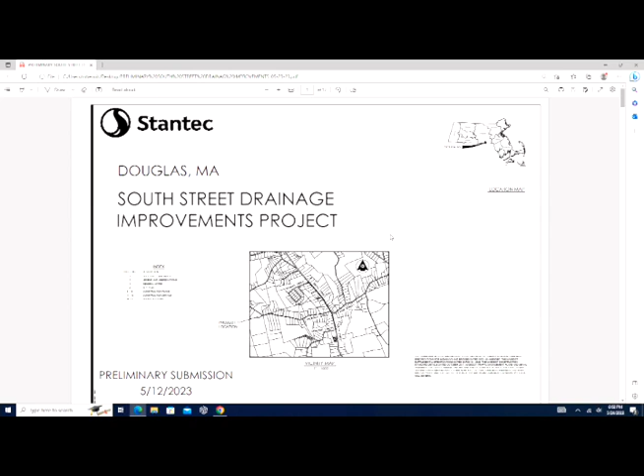As I said, my name is Dave Glenn from Stantec. We've been working with the town on this project for about a year now. We have provided a preliminary plan, which is shown on the screen. This plan addresses proposed drainage improvements, the proposed project, and project limits.

Sure. Am I there yet? Can you tell me where to go? Yeah, that one. This one.

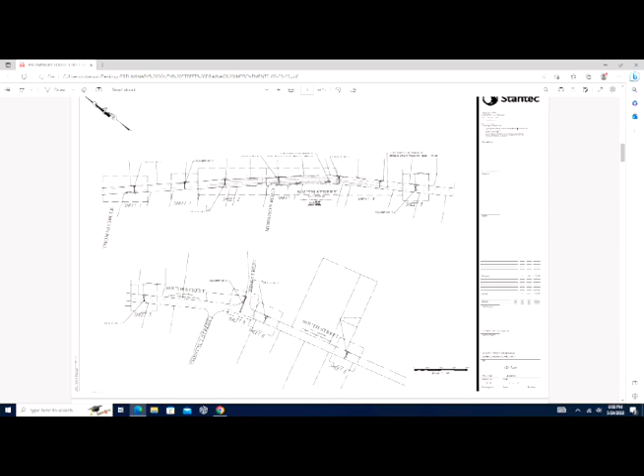So this is a key sheet of the whole project corridor. It's basically starting from Thomas Circle, which is a private way, going all the way down South Street, and ending pretty much at Hemlock. The next sheet, I think... Nope. Oh okay, yeah I can cut it off. But Hemlock is right in this location here.

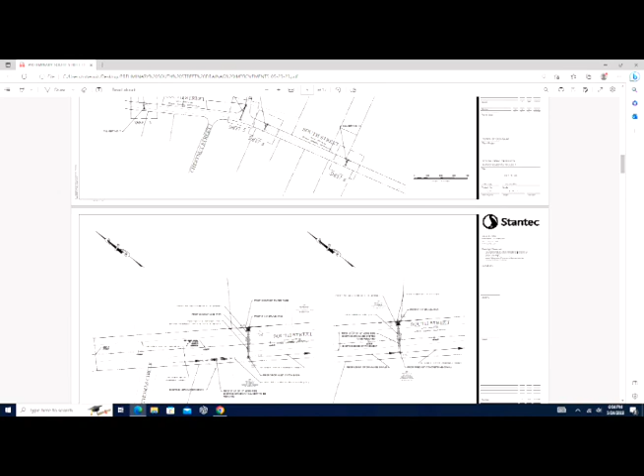On South Street itself, there are approximately 10 cross culverts that we'll be replacing that go underneath the road. The culverts that are there now, some are corrugated, some may be concrete, but they're not in the best of condition. So the goal of this project was for drainage improvements to replace all 10 culverts with new culverts.

We're going to keep the same size of the pipe that's currently there now, whether it's 12-inch, 15-inch, or 18-inch. Size is staying the same. We're putting in an HDPE or plastic pipe, which is more durable than what's out there now.

It's a corrugated pipe. There are 10 locations, and in these plans we actually zoom in on each culvert location, giving a detail of the culvert, size of the culvert, and what's being replaced. So that's one part of the drainage improvements, replacing all 10 culverts.

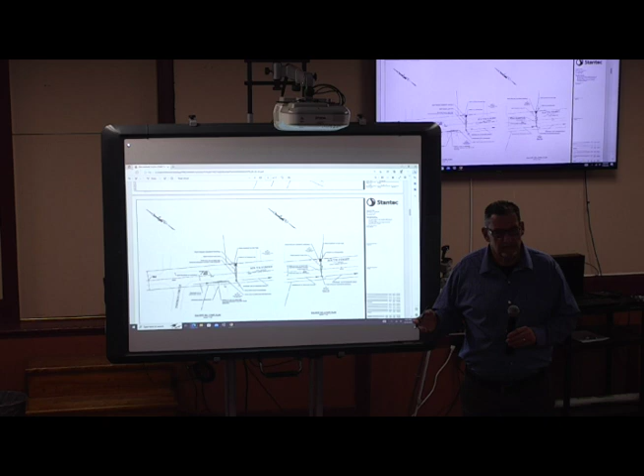Obviously, when you replace the culverts, you've got to do the head walls or the outlets. So all the outlets will have a precast concrete head wall. Right now there's some stone out there, a mix of everything in the head walls. It's all going to be a precast concrete head wall with all the culvert outlets.

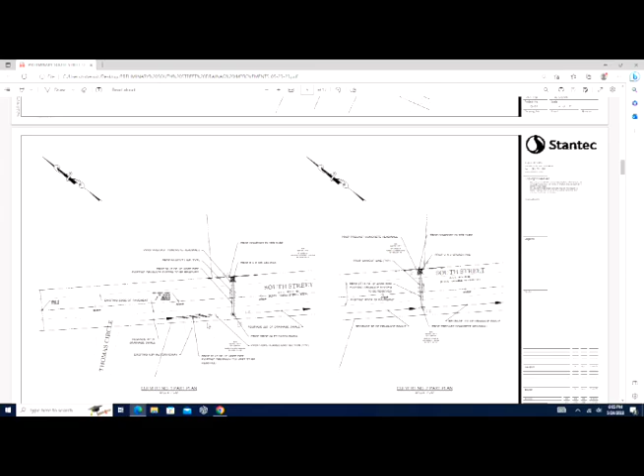The inlets, basically, it's going to be what's there now, except we're putting in new structures. There's a catch basin there, there'll be a new catch basin structure, precast structure. If there's a drop inlet structure there with a throat, there'll be another catch basin with a throat. So basically we're taking out the old structure that's there now and putting in a completely new structure. That's being done at all 10 culvert locations.

So it's a combination of a new head wall, or a drop inlet or catch basin structure. And the road will be paved, with temporary paving where the culvert is done, and maybe we'll talk later about the second phase of the project.

Other improvements - obviously everybody knows there's a swale out there. We're looking to regrade probably 60% of the swale. It's either going to be completely regraded, reshaped, reloamed, reseeded, and then about 30% of the swale is going to actually be regraded where we'll put in crushed stone, 2 to 3 feet of crushed stone, and a riprap bottom to help control infiltration, get a little more infiltration, and control the flow.

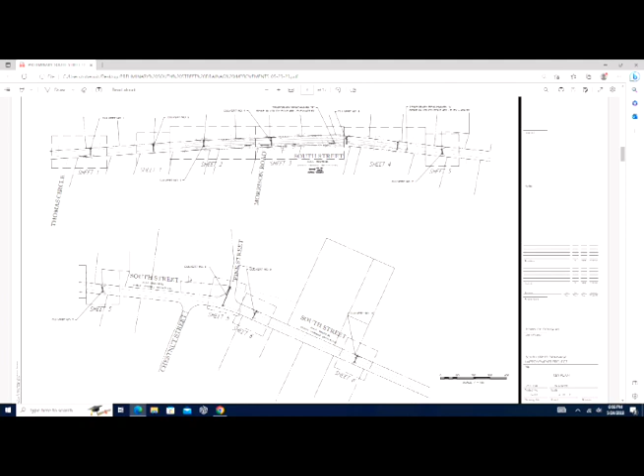And then we're actually going to put in stone check dams within the swale that will slow down the flow of water. So we're trying to control the water a little bit more within the swale area, which is on the east side of the road. So we're not looking to change drainage patterns.

So if the flow was going to a certain location now, in general we're keeping that, but we're trying to control the flow a little more by regrading all the swales, getting some infiltration in there, cleaning up the swales. The road will be paved as a second phase, so you get a crown back in the road, which you really don't have out there now. I think all these improvements will help control the flow of water within the roadway system itself.

We're also replacing a number of culverts at individual driveways. If you have a culvert under your driveway, that's going to be replaced too, again with the same HDPE pipe. That will have plastic flared ends as opposed to a concrete head wall. Those are being replaced also for driveways.

Overall, I think it will be an improvement over what you have now. Between the roadway repaving, the drainage improvements, cleaning up the swales, putting in the new culverts and new structures, I think you're really going to get more control of the stormwater flow in that area. It'll be an improvement over what's there now. That's really an overview of it.

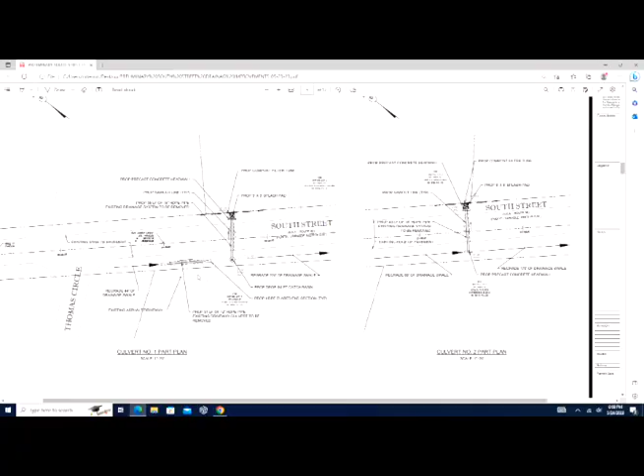Again, these are preliminary plans. We haven't gone final yet, so obviously I'd like to get feedback from you folks who live there - you know it better than I do. So I think that's really a quick overview.

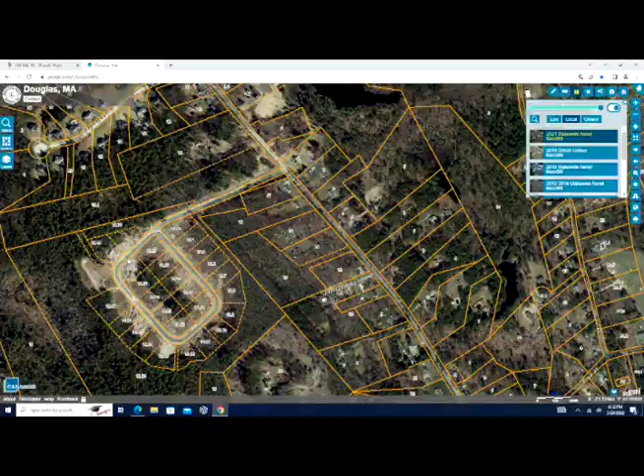And you're only going to go as far as Hemlock? Yes. I don't understand why you don't go right down the Rhode Island line, it's a mess. It's the whole money thing. We had to find a project limit somewhere. Across from, just before you get to Billy Porter's down there, when you get a hard rain, there's a puddle that'll suck up the whole car. I think that's a good point, I think you guys even mentioned that, that's another phase. So we get X amount of dollars through Chapter 90 a year, and this project, preliminary numbers, is over $1 million.

That's all the money we have. Correct me if I'm wrong, this is the one road you're looking at doing this year. Correct, it's the only one. So it's not like you're taking them off of another job, they're going to have their direct and undivided attention. Are you having the same contractor that paved it a few years back up by Downs's? It's going to go out to bid, so we're not sure who will get this.

I'm sure. So I sent you numerous pictures of the flooding that takes place in the front. You said you forwarded it to this gentleman. Of course, I don't know if he can specifically remember, but there were huge pictures of the flooding. It's been out there, a big huge pond. Do you think, in your opinion, that what you guys are doing is going to change that? I think it's definitely going to be an improvement.

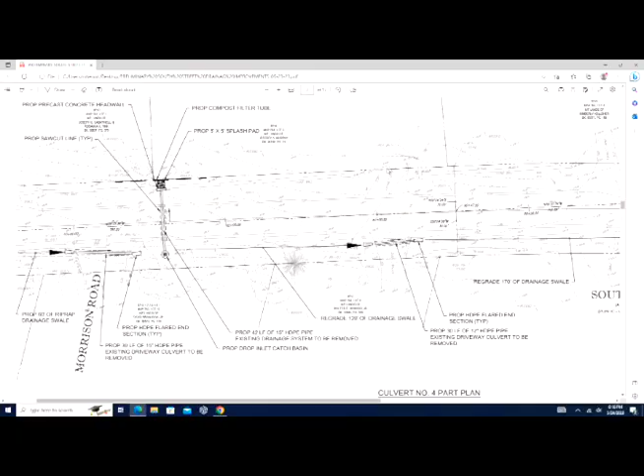Which property is yours? 204. So on our property, there's a trench down, and the water comes in, fills up in the woods, and goes up into the man-made pond behind McNeil Hall. Now you have one right above you that may or may not be functioning. Oh, it's functioning, it does function. That's the thing, and we're going to clean these out so they function better.

I can't see how they're going to. I don't see, are there people up the road who aren't getting any water while we're getting all of it? Or are they getting water up the road as well? It just seems like once we clean out the pipes, it sounds like more water, not less.

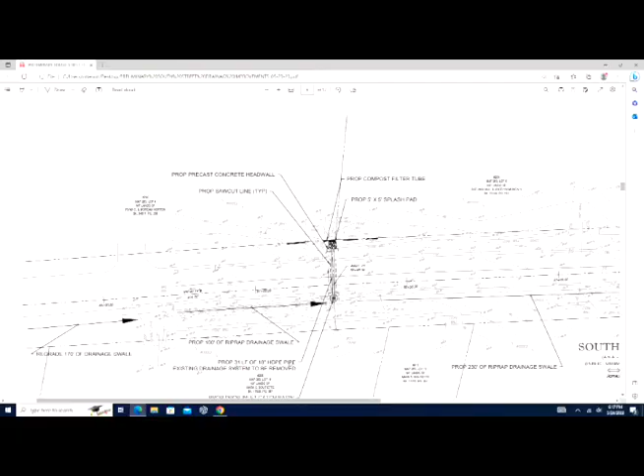Well, I think once you reestablish the crown in the road... because right now the sides are built up from sand, from what I can see, so some of that water isn't even getting into the swales off the side of the road. Once the crown is established, you'll at least get the water off the road into the swales, and we'll regrade the swales, get crushed stone in for infiltration, and put in check dams to slow down the flow of water.

Can you define the word swale and where they're located? The drainage swale is the channel across the street where they've got the little trench, the one the Amazon guy gets stuck in all the time, on the other side of the street. They clean it out every once in a while.

Yeah, I think there's definitely a need for maintenance on the swales that are there now. This project is going to basically maintain these swales, regrade them, and rebuild them up so they're functioning a bit better than they currently are.

Is this water drainage going to be MS4 compliant?

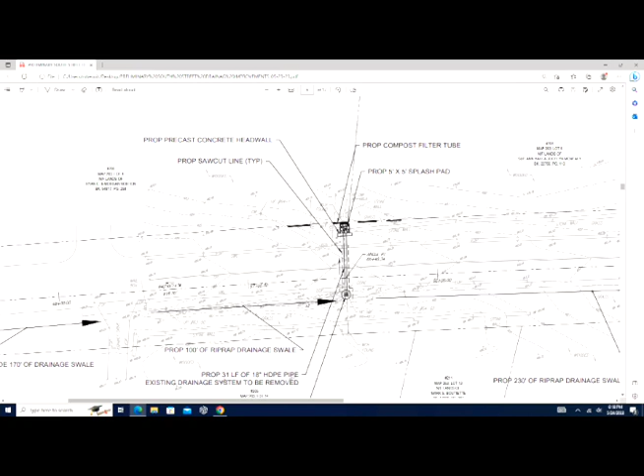This isn't an MS4 area. Why isn't it? Because the state defines our MS4, and that's not included in it. Our MS4 area is all down here, downtown, defined by population and density. Out there, it actually stops somewhere before Old Farm Road on South Street. That's as far as it goes.

I have one more question. From the culvert, we have a trench, as you know, that our neighbor dug, blocking us from a large portion of our property on the other side. Are we required to keep that trench there? Because it's a hazard. Fully knowing you guys are going through litigation right now, I don't think we can comment on that. And that's private property, right? No, it's my property. So I don't know how we can answer that. We've mentioned it in the past, and you've said our work is contained just within the right of way. The trench, I don't think we can comment on, because we didn't do it.

So what are we supposed to do with all this water we're getting from the culvert? Well, the way it seems, you're getting probably a lion's share of it already. If it's spread evenly throughout the rest of the project with proper drainage swales within the right of way so it can infiltrate into the ground, you shouldn't be getting the volume you're getting today.

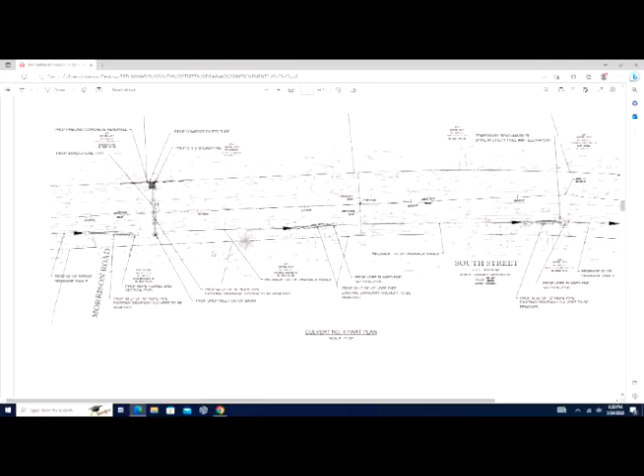So if you were to number the road, like where it starts, I know Morrison Road—how far up the road are we talking, where these 10 culverts are? What street number, if that's possible? My house crossing 195, right? That's about it? That's not really a lot. 188 is one of them. I'll go a little closer. Let me go to the first sheet.

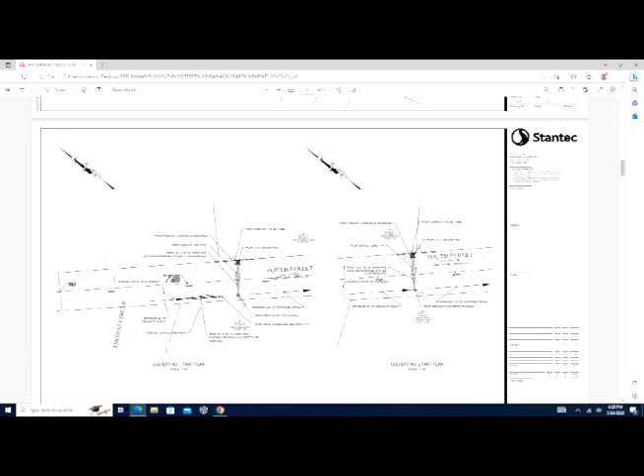But even just this one alone, Dave, there's a lot going into just this area. You have a lot of different parts being adjusted, right? From that location, that one alone—so in my case, my driveway, everything from my yard comes down my dirt driveway and out this channel. Which property is yours? 195. Okay, thank you.

And that all ends up either washing the driveway out into the road or into the drainage ditch. So I have a stone wall on the left. I talked to somebody from the highway department about removing the wall. What can I do on my property to help alleviate water? I already dug a huge dry well on my property to capture some of it further up, and that seems to be working pretty good. But I wanted to take that wall out so it didn't block the water. Where is the wall?

If you don't mind—if you're facing the house, it'll be on the right side. Right side of the driveway? Yeah. In between the driveway and Thomas Circle? Yeah. I hate to ask, but are you also getting any sort of water from Thomas Circle?

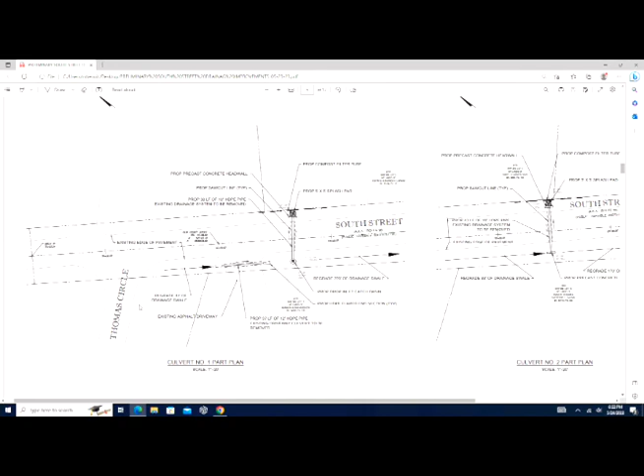Yeah, it comes from around the drainage basin corner, that's kind of above you that no one maintains. I don't really see it, but I'm sure it's just heading down the road. Yeah, it comes right around the corner. It's flooded a couple times. So the situation might be slightly compounded, right?

Because you've got this development not having its stormwater management maintained, because it's private. Right, exactly, and I think that just adds to all our problems. I wanted to pave this year, which would probably help, but I don't want to spend the money and just have water take out the driveway.

Yeah, so I wasn't sure if that wall could come out, and I could put a dry well there, and maybe just grade it so it comes over into the gully. Dave, is this the one we're changing to a catch basin that's just a pipe right now? I think that's where you guys would be starting. This is what I'm trying to figure out.

I believe this was the one we're going to add this catch basin to. So at Thomas Circle, one of the things we just did recently, which may help a little bit too—we went up there and opened up the two catch basins at the end, and we ripped out the silt socks they had in there.

They were completely full because the developer left them in there, and all the dirt was running down and filled them right up. So we removed them to help the water get in there. If it had a top coat of asphalt on that development, that would help the best. But we removed them, took the edge of all the dirt that was left there, and scraped it away to get the water in there, to help alleviate some of that.

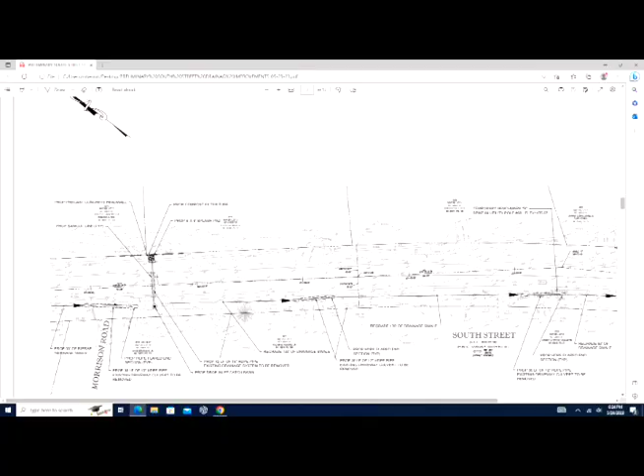I got a culvert, I got the swale in front of my house, and it's right on the edge of the driveway, which people have been falling in. I had to move the mailboxes because it got really dangerous over there. So I'd like to have that filled in, but I will give on the other side of my property, which goes up to the next driveway, if you need to make a swale in there, because I know a lot of the water comes off the hill.

Out of the woods - I know exactly - and collects down there. But I need to move it over, give me a little more room off the driveway so we don't fall in, because you don't see it. And then on the other side of the telephone pole, if we can put a pipe underneath there and carry it across. Dave, I think that's where we met out.

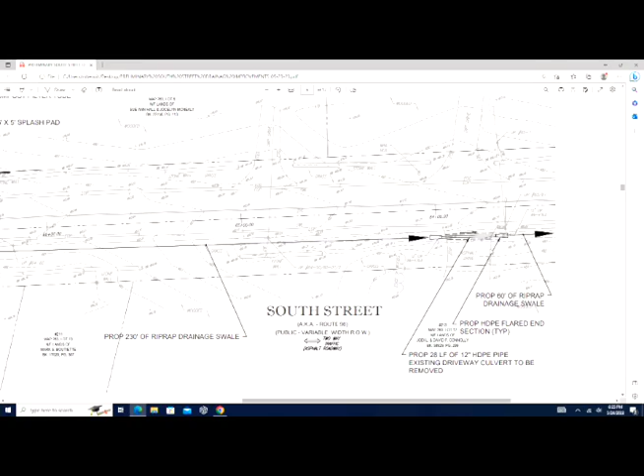That's where we met up - you and Adam had met out there. Right now, we're proposing to put a new culvert under your driveway and basically regrade that whole swale. That's going to be a rip-rap swale.

Yeah, but that's not what I want. I want to eliminate that. I'll give you all the way on the other side - you can take it from the other side of my driveway up to the next driveway. I own that whole frontage of woods there. That would give you a lot more room to soak up the water and help the people downstream.

Is that straight across from my driveway then? Yes. I was just going to ask, who owns those woods? Can we put water there? Let them put the culvert in there where there's nobody. So the culvert goes across, the swale across the street - that's the driveway, yeah.

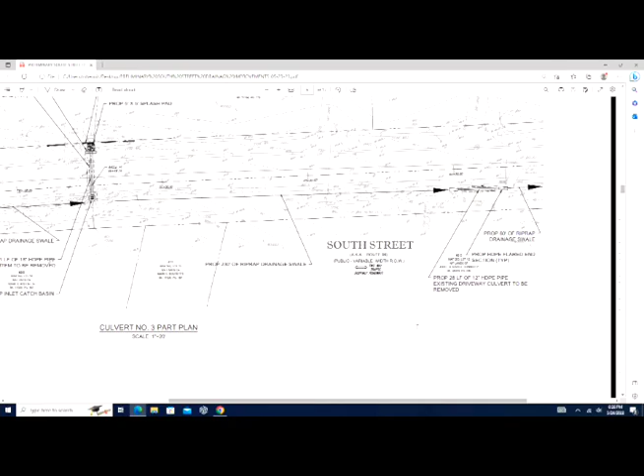The only concern we had there was because, again, the roadway as it is now, there's no curb, so when the road gets regraded, it's going to drain off into the swale. There's no closed system out there.

Yeah, but I have added water that comes off the hill through the woods. There's a spring up there that adds to the water. That also adds to everybody else's problem. Well, that whole side is very wet, for sure.

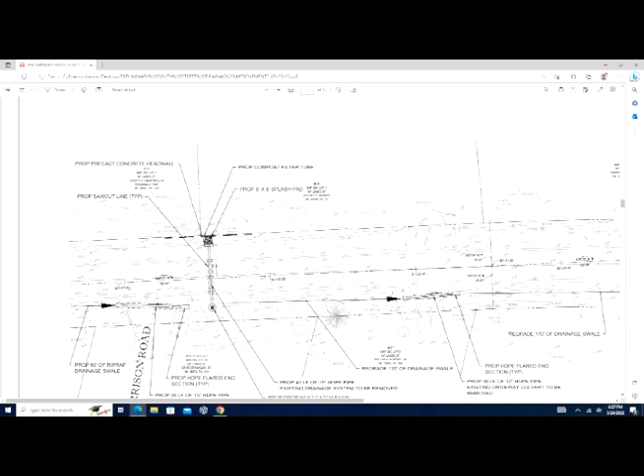That could be dug down and re-gravelled so it drains better - that would help a lot of people. That's the intent of that swale, it's going to be crushed stone, two to three feet of crushed stone, riprap on top, and then you're still going to have the swale, which will probably be higher to get the runoff from the roadway itself. But there's no swale there now.

There's no swale, that's a different location. A different point about that? Yeah, it starts right next to my driveway at the trailer park. Then there's a swale directly in front of my house. Then there's a dirt road and a catch basin - which is that Morrison Road, right? Which is on the other side of the dirt road, yeah.

So we're kind of running the edge of both places, he's over here - oh, that's the trailer? Yeah. I didn't know it had, I didn't know either, honestly, I'll tell you, John had to tell me.

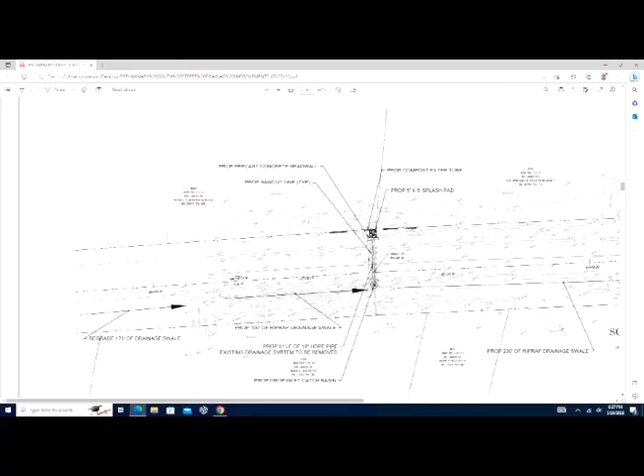From way back when, I had no idea. But if you can pick up the swale from the other side of my driveway to the next driveway, there's 150 feet of frontage there.

So you're saying potentially help by creating a swale here? Yep, that makes sense. And then on the other side of your driveway, fill that one in for the drain with a pipe instead of an open swale. That's what you're asking? Yeah, and just kind of move it over a little bit off the edge of my driveway, on the left side if you're facing the house, on the right side, because it's right on the edge of the driveway.

It's a couple feet deep over there too. I get people coming over there that don't know my driveway, and they end up in the ditch.

Oh no. Dave, engineering-wise, capping a pipe over a swale, you don't get infiltration. I'd be careful with that. Well, you could put in a perforated pipe. Yeah, with stone, but to me you still need something of a swale for conveyance. Sure, because you're gonna get runoff from the road, it's still gonna go off the road.

So where's the runoff from the road going? You're not that far from that catch basin. For that little section I'm talking about, from my driveway to the catch basin is like 100 feet, maybe, if that, and you've got the dirt road coming out onto it too. But now you'd end up directing all that 100 feet of roadway to that one catch basin.

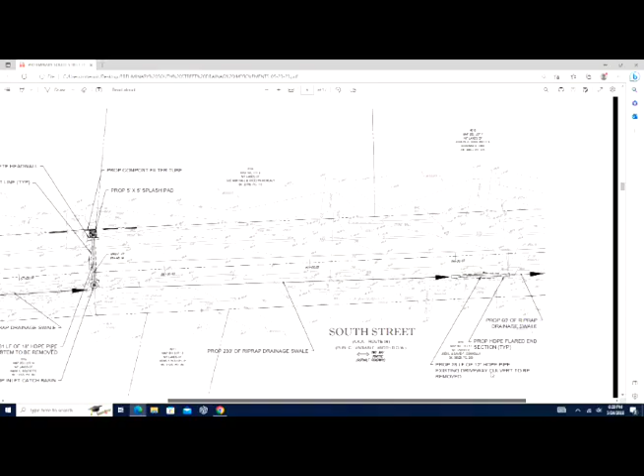No worse than it is now. Well, when we regrade the river road, you're gonna have tire ruts there though. It still gets, you'd be surprised how much water gets splashed into those just from the tire ruts, because it comes down the ruts in the road. It's a river on some of the rainy days.

I guess what I'm saying though, is you're gonna have a pitched crown once this road's crowned, with a cross slope, so you're not gonna have ruts in that road anymore once it's paved. No, but underneath it, fill it in with crushed stone, let it go through the grass. You don't need to have a pipe in there.

And we can take a look, I still think you need some sort of swale, but we can soften it, because right now, do you like a swamp in your front yard? That's what I have. I get bees in there, I fall in there when I'm trying to cut it. It's nasty. I understand, we were out there. I'd be better off with a wall there and a railing than I would be with what I have now.

Definitely going to take another look at that area for you. Yeah, we'll definitely take another look at it. For sure, thank you for that.

Appreciate it. Is there any other properties anyone hasn't asked about yet? Anyone else have any other questions?

When you clear everything out and you have all the water running, should each individual property do something to help that water go? Because on our property in 204, we have a big pond almost, and then we have trees in front of that getting swamped, like they're gonna fall over. But right in the middle there is a little bit of a ditch. Should we do something with that, or can someone look and tell us exactly what to do to help that water go away?